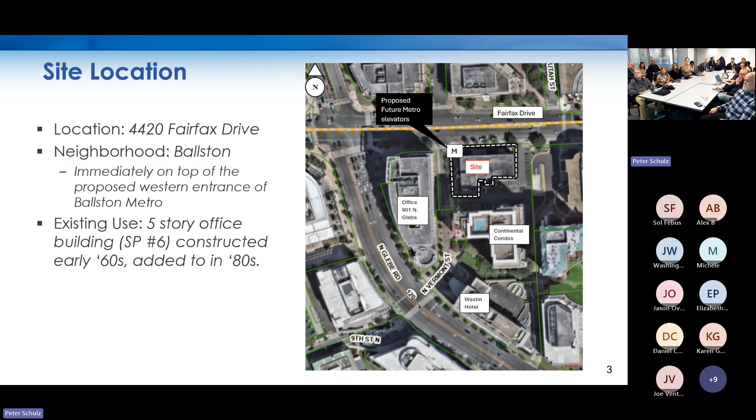A close-up of the site here: it is bounded by a street on the left, but private alleys to the south and east that are all part of the site plan 331 overall site plan.

Existing conditions that most people are familiar with: it's a 5-story office building that was built in the 60s and added on to and renovated over the years. I'm showing you some of these existing conditions, which I hope most people are already familiar with.

This corner on the left here is going to be the future location of metro elevators, which Daniel will tell you about a little more later. On the right, you get a sense of the alley system, which is private. There is a fire access easement over them, and it does provide service access and parking garage access to the Continental.

The existing office building had a small parking lot of its own. To give you an overview, what the applicant is proposing is something that was actually proposed and approved 20 years ago, but remains unbuilt to this day just because of economic issues.

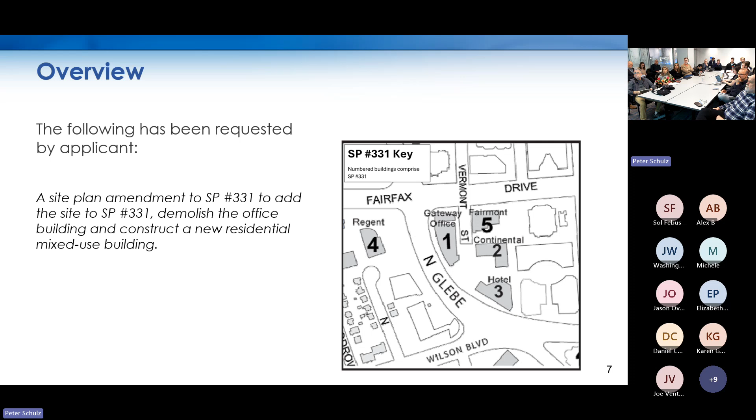What's being added to the site plan 331 is Fairmont Building number 5. So it's adding site area to the existing 4 buildings of this current Arlington Gateway site plan, which includes 2 office buildings, a hotel, and a condominium development immediately south of the Fairmont building. So we'll make the site plan bigger - that's basically what it is.

The proposed development, as you are aware, is largely similar to the 2006 approved development with a maximum building height of 246 feet, which is the absolute maximum permitted by the zoning district, as long as the developer provides a package of benefits that justify the extra height and density.

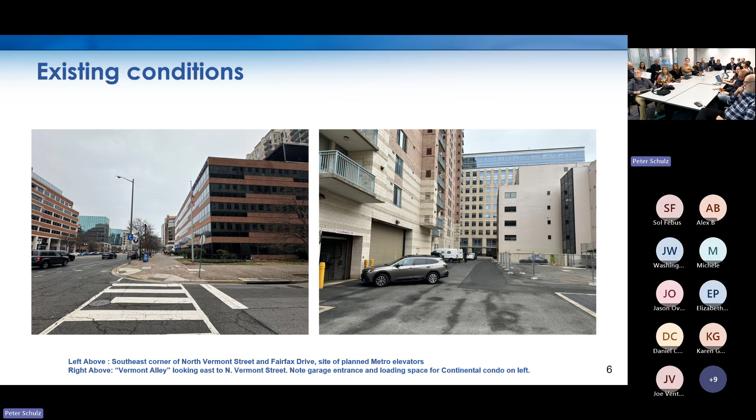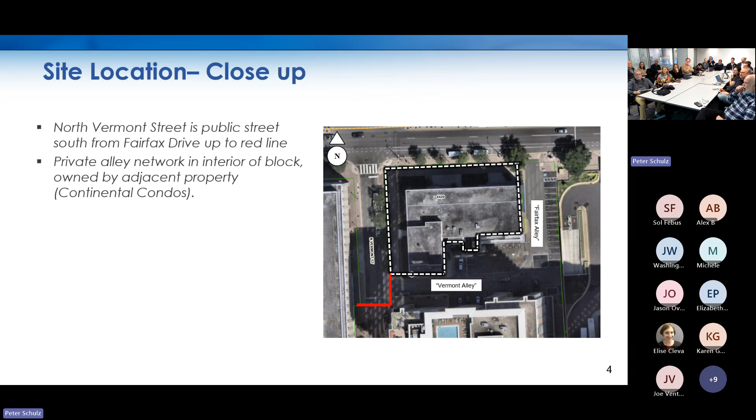So anyway, a very tiny site plan area, I should say. The actual land that the Fairmont owns is very small. The alley network is actually owned by the Continental, as we will see.

So I'll give you a brief description of what's going on here. There is less parking than was approved in 2006, which is consonant, as Daniel will tell you, with county practice and policies that we have adopted in the last 20 years, especially on top of a metro entrance.

There is a requested modification for the number of loading spaces, and later on you'll see a question that staff would like to hear the SPRC opine on about the depth of the proposed loading spaces.

Zoning modifications, as I alluded to - additional density and 30 feet of additional height - are all permitted by the zoning ordinance as long as there are community benefits, as a shorthand. These are items allowed by our zoning ordinance for environmental benefits, housing, or community facilities.

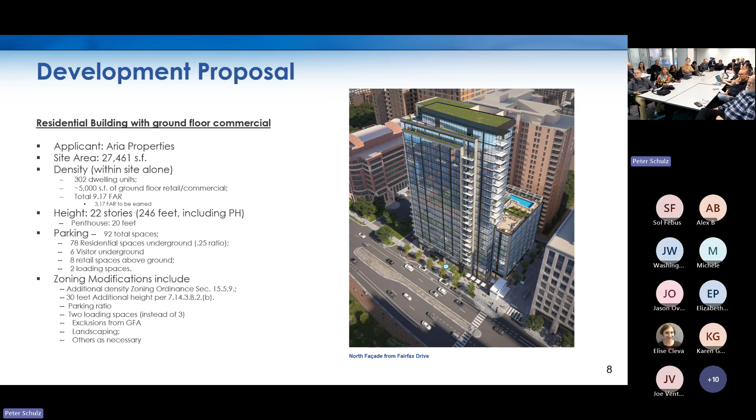A reduction of the zoning ordinance required parking ratio, and there may be some landscaping modifications from the zoning ordinance as well - we can see as we progress through this SPRC. The zoning is a special zoning district for Ballston.

The zoning and the GLUP match. So this site is already zoned appropriately, it's not asking for a rezoning or a change to the general land use plan. All of central Ballston is zoned the same.

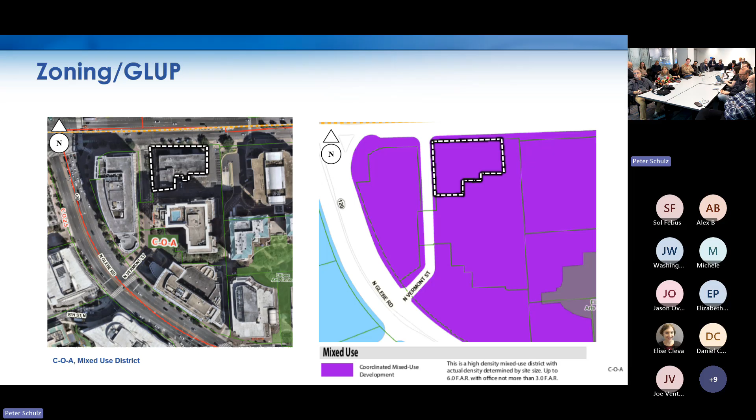The idea of this central Ballston district was to basically be a second downtown to Arlington after Rosslyn. When developed in the late 70s and early 80s, it was actually meant to encourage residential development, with incentives for residential development in this special zoning district, as we will see when we come forward.

The policy guidance is the Ballston Sector Plan, developed in 1980, but many of its recommendations are still valid with good urban design guidance. There's also the zoning ordinance requirements in the C-O-A zoning district, the master transportation plan and its various elements that Daniel will speak to, the Rosslyn Ballston streetscape standards, Arlington's retail plan, off-street parking guidelines for multifamily residential projects in the Rosslyn Ballston and Richmond Highway corridors, and other things like the community energy plan or affordable housing policy.

The land use and density: the sector plan does plan this area for high density mixed use. I spoke about the incentive for residential development.

Densities allowed, at least by the base density in the zoning districts, are up to 6.0 FAR, the second highest outside of Rosslyn, with office supposed to be no more than half that. In the early 80s, there was an imbalance of office development as opposed to residential development, so this was intended to incentivize residential development.

Also to consolidate large sites too. So the actual density and height that you qualified for would actually depend on the site area that you had assembled as a development site.

So the applicant's proposal is in line with what the sector plan says, residential use and retail. The density is about 9 FAR just on the site area alone, well over the base. However, because it's incorporated into site plan 331, all those 5 buildings of site plan 331 would only be slightly over 6.0 FAR altogether.

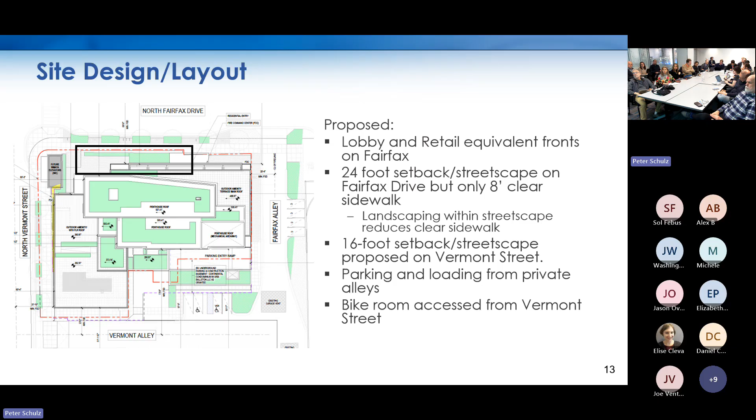There is a bike room accessed directly from Vermont Street on ground level, which is something we encourage. This shows the site design and layout, the residential lobby, and between two retail components, with the retail adjacent to a proposed plaza by the elevators.

Mr. Creed will tell you more about the county's plans for the elevators. You see the loading that comes off the back of house from the Vermont Alley.

Above-grade transformers, which staff has noted as an issue. The width of the transformers faces private property. The county's policy on transformers is that if they have to be above ground, and it seems Dominion has been forcing things that way, let's make them look as good as possible.

Regarding rights of way, Vermont Street will stay as a public right of way. We've just confirmed that with the applicant — they're not vacating Vermont Street. It will stay. However, Vermont Street right now does come to an end, and then it is private, shared between the Continental and the hotel.

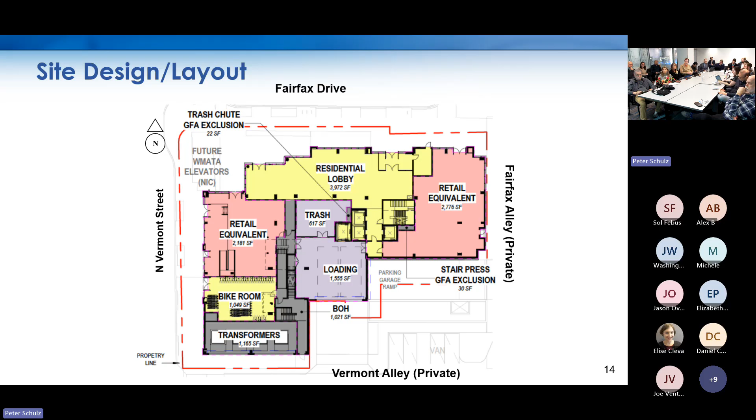So let me speed things up and turn it over to Daniel. Thanks, Peter. I'm Daniel Creed with the Department of Environmental Services, and I'll be covering the transportation topics.

The site is at the corner of North Vermont and Fairfax Drive, and it's well served by a variety of multimodal transportation options. Within an eighth of a mile is the Ballston Metro Rail Station, serviced by the Orange and Silver lines. There are also local and regional buses at the Ballston Station bus bays, and on site there's an existing ART and Metrobus stop at the corner of North Vermont and Fairfax.

There are also several Capital Bikeshare stations located within the vicinity, including Fairfax and North Taylor, North Stuart Street, North Tazewell and Glebe, and 11th Street and Glebe.

As Peter also mentioned, the site is subject to transportation policy found in the Master Transportation Plan, the Rosslyn-Ballston Corridor Streetscape Standards, and the Ballston Boulevard Area Plan, also known as the Sector Plan. On the right, you can see an excerpt of the Master Transportation Plan map with the site highlighted.

The MTP identifies the adjacent segment of Fairfax Drive as a Type A, primarily retail-oriented mixed-use arterial road, planned for 2 to 4 travel lanes, turn lanes, no median priority, restricted or limited driveway access, and high on-street parking priority. For North Vermont, the MTP...

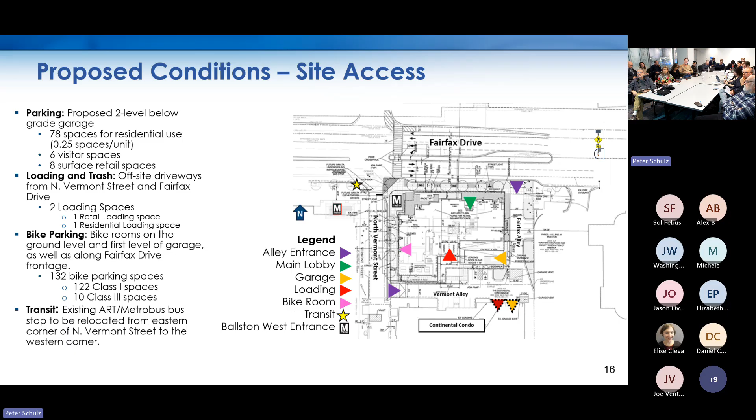The applicant is requesting a parking reduction based on the off-street parking policy for residential multifamily projects within the metro corridor. This policy allows site plan applicants to request reduced parking rates based on proximity to metro station entrances, with rates ranging from 0.2 spaces per unit for sites closest to a metro entrance, within 1/8 of a mile, up to 0.6 spaces per unit for the furthest.

That's where this site is located. Within the 0.2 ratio, the minimum required under this policy would be 60 spaces for residential, and the applicant is proposing a residential rate of 0.25 spaces per unit, or 78 spaces.

In addition, calculated separately from that 0.25 ratio, the policy requires providing visitor parking of 0.05 spaces for the first 200 units, which in this case would be 10 spaces required, and the applicant is proposing 6 spaces at this time.

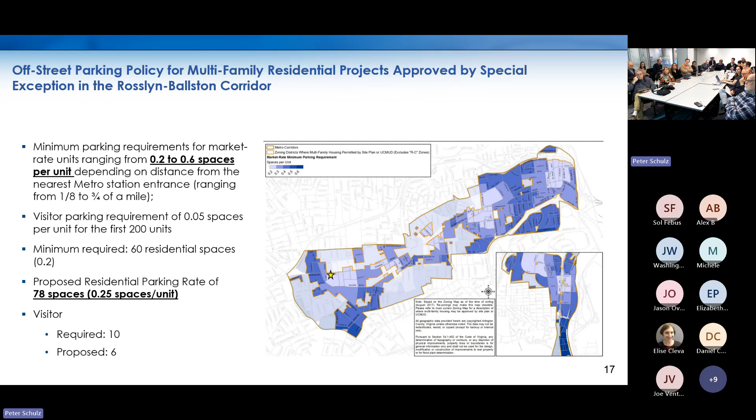For loading, the zoning ordinance requires 3 loading spaces, 2 for residential and 1 for retail. The applicant is proposing 2. The dimensions meet our zoning ordinance requirements, but standard site plan conditions require one of those to be longer: one is 30-foot, and one has to be at least 40-foot in length. Both are proposed at 30 feet.

It's also required, under site plan conditions, that if one of these spaces is being used for trash, which it is, it must be at 15 feet in height. The applicant is proposing 14 feet in height.

There is a large surface driveway due to the nature of this site, with loading and access being through the Continental property. The red is the property line. So the concern could be, the site plan conditions also require loading activities happen behind closed garage doors. If that 40-foot truck came, would they be able to close the doors, or would those loading activities spill out?

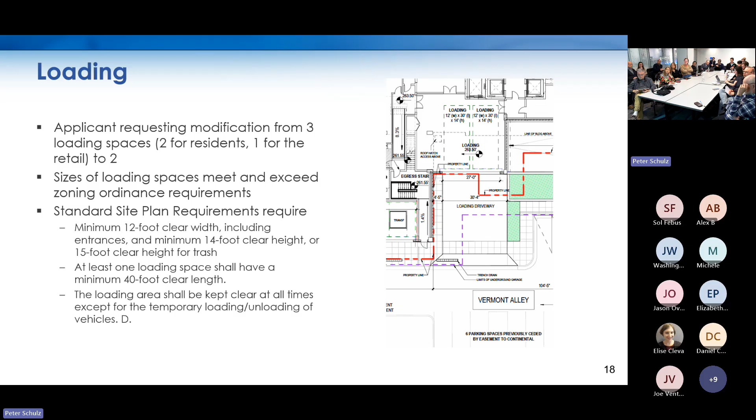All right. Button, or do you want to go back? No, don't go.

Next we will look at the proposed conditions, starting with Fairfax Drive, and we'll summarize the changes on the right. Within the Rosslyn Ballston streetscape standards, Fairfax Drive is identified as a special streetscape, which requires a minimum 24-foot wide overall streetscape, street trees within a 5 by 8 or larger tree pit, setback 3 feet, and a 16-foot clear sidewalk. You can see the cross section above.

The applicant proposes to reduce the overall width of Fairfax Drive to 92 feet by slightly narrowing travel lanes and parking lanes, but the overall configuration is unchanged from today. In terms of streetscape, the applicant is proposing to meet that 24-foot wide overall streetscape, with a 0.67-foot step-out zone, a 6-foot wide tree pit, an 8-foot wide clear sidewalk, and a minimum 9.3-foot building shy zone.

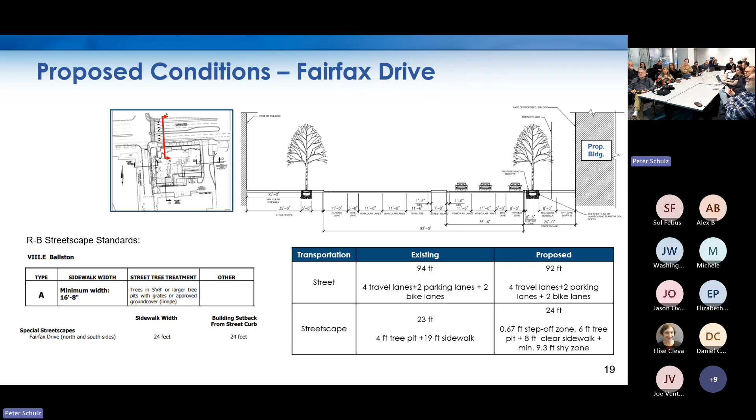And then we'll look at North Vermont Street.

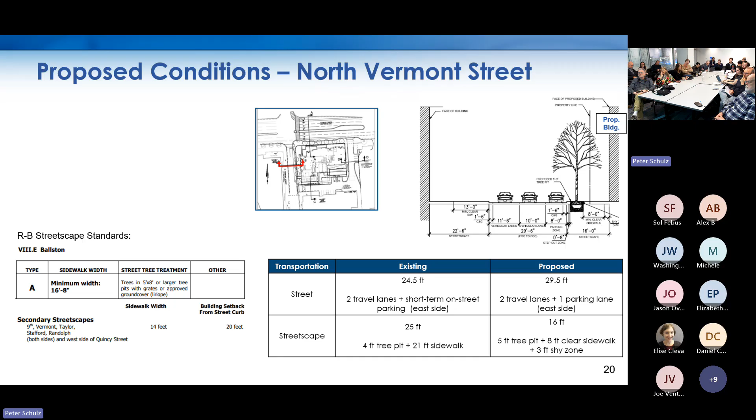That's identified as a secondary streetscape, requiring a minimum of 14 feet plus the 6-foot building setback, totaling 20 feet. That consists of a 6.67-foot step-out zone, a 5-foot wide tree pit, and an 8.3-foot wide clear sidewalk. The applicant is proposing a 16-foot streetscape, a 5-foot wide tree pit, an 8-foot wide sidewalk, and a 3-foot wide building zone. The alleys are off-site, so we don't cover those.

This project is fully funded. They have completed their 35% design and are currently in the contract negotiation phase. This phase should take about 8 to 12 weeks as they negotiate that contract. After the contract is negotiated, notice to proceed is issued to the design builder, and that's when they'll resume design and pick up from the 35%, starting those other major milestones in the design.

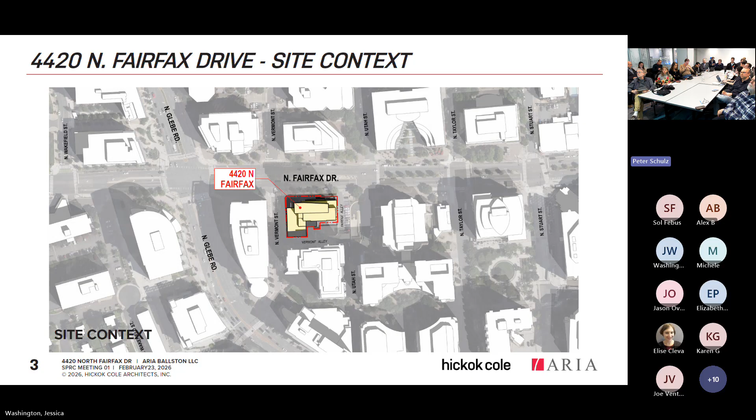The site is zoned to the C-O-A mixed-use zoning district and is designated as a coordinated mixed-use development district by the county's general land use plan. The site is currently improved with the Fairmont, a 5-story office building constructed in the 1960s under site plan number 6. There are a few existing tenants, including Arlington County Public Schools, which has been temporarily using the building as the location for Arlington Community High School, with plans to relocate the school to its new location at Amazon's headquarters building at Metropolitan Park.

Originally, the property belonged to site plan number 6, but in 2006 the county board amended site plan number 331 to incorporate the site into the existing site plan known as Arlington Gateway. The site plan has been extended numerous times since, and the approved plans have remained largely unchanged.

As it stands today, site plan number 331 provides for an L-shaped 23-story residential building containing a total of 242,846 square feet at a density of 8.84 FAR, with 237 dwelling units, 7,088 square feet of retail space, and 241 below-grade parking spaces. As the previous owners of the property never brought the approved site plan to fruition, Aria Ballston LLC looks to refresh the approved building with proposed updated building designs.

Since acquiring the property, we've been working diligently to prepare plans for the development and have met numerous times with Arlington County government representatives, WMATA entrance project representatives, and neighbors, including the Continental at Ballston Condominium and the Ballston-Virginia Square Civic Association. We are pleased to share with you our plans this evening.

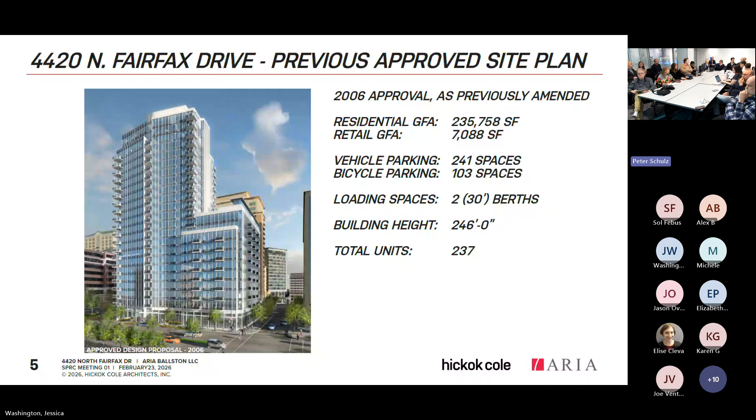The submitted plan, and I should add that some of the stats that were in the prior presentation by the county officials, we've incorporated feedback that we've heard from the county, and what you see in the statistics and images here are updated plans from what was just presented. So it's not just saying the same things that you guys just presented.

The submitted site plan amendment includes a 22-story mixed-use building containing 302 market rate units and 251,737 square feet of gross floor area at a 9.17 FAR. The building will also include approximately 4,957 square feet of retail or retail equivalent GFA and a 2-level below-grade parking garage with 88 parking spaces.

As previously noted, the current site plan approval has remained mostly unchanged, and our proposed massing is very similar to the massing of the existing approval. Given that the existing approval is from 20 years ago, there is need for redesign to bring the site plans into conformance with modern architectural form and current codes and design standards.

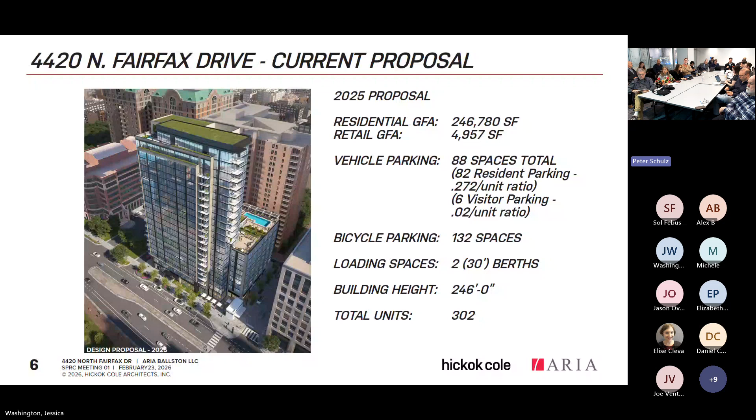As such, we are proposing changes that will refresh and update the building design while staying within the general parameters of the approved building. The residential lobby will be accessed from North Fairfax Drive. We have planned for 2 retail corners with frontage on North Fairfax Drive and North Vermont Street. We have prioritized bicycle storage with a secured bike room at the ground floor with access from Vermont Street, as well as a second bike room located on the first parking garage level.

Site improvements surrounding the property include 24-foot and 17-foot streetscapes on North Fairfax Drive and North Vermont Street, respectively. In response to county feedback on earlier plans regarding the Fairfax Drive frontage, we have widened the clear sidewalk space along North Fairfax Drive from 8 feet to 10 feet 6 inches, with a 6-foot tree pit zone.

Additionally, we've incorporated a 40-foot long curb extension to support the bus stop at the far corner of the Vermont and Fairfax Drive intersection. Also along Fairfax Drive, there's a curb lane of street parking, an existing bike lane, and a curb extension on both sides of the Fairfax Alley.

The streetscape at North Fairfax Drive is planned for a 24-foot dimension and is even wider at the curb extension locations. Our plans propose widening Vermont Street to 28 feet 6 inches to include a proper curb lane for parking, given the existing street does not comfortably accommodate parking.

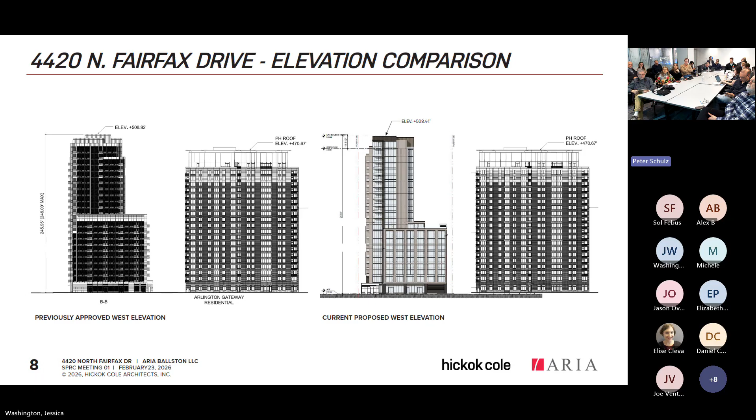So, comparison of the previous approved design and our current proposal. Similar to the previous design, the current building is made up of two major massing components: the tower component, which extends to a height of 246 feet, and the podium component, which is the lower portion of the building that fronts Vermont and forms an L shape. Overall, the height is the same, and you can see in this diagram that the proposed height of the new podium is a little bit lower.

As you move vertically through the building up to level 10, you'll see on the image on the left-hand side a residential amenity deck that will have opportunity for outdoor space and greenery. As you continue into the tower component of the building, levels 12 through 22, the units get a little bit larger, all the way up to the penthouse, where there's an additional residential amenity and terrace to again take advantage of the views, especially to the northeast and back to Washington, D.C. That level also houses the mechanical penthouse.

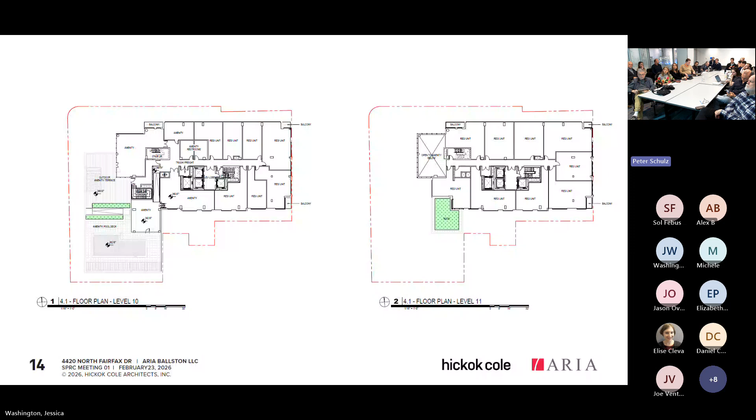I think our next slide is probably the site improvements. Sure, John, I can walk through these quickly if you don't mind. I can do it.

So momentarily, you'll see a more detailed look at the landscape and streetscape plans.

As mentioned previously, the North Fairfax Drive streetscape will be 24-foot wide, and North Vermont Street streetscape will be 17-foot wide, with even greater width where there are curb extensions. These large streetscapes will dramatically improve conditions for pedestrians.

A 40-foot long curb extension along Fairfax Drive with a clear sidewalk zone for the bus stop brings the current outdated bus stop up to date with current county standards and ensures buses have easy access to the new metro entrance, so riders will be able to safely access the bus.

There will also be a parking lane and bike lane on North Fairfax Drive, and we are proposing to widen Vermont Street with plans for a true parking lane on the east side of Vermont Street.

We're planning, as stated earlier, for large 6-foot tree pits on both frontages that range in length from 12 to 15 feet. Earlier plans did show narrower 5-foot tree pits on Vermont Street, but we've increased those widths. These generously sized tree pits will foster the growth of trees that will help cool the site, provide shade for pedestrians, and create an attractive streetscape for the community near the new metro entrance.

Widened sidewalks and shy zones are proposed on both street frontages to support pedestrian movement, with clear sidewalks of 10 foot 6 inches on Fairfax Drive and 8 foot on Vermont Street.

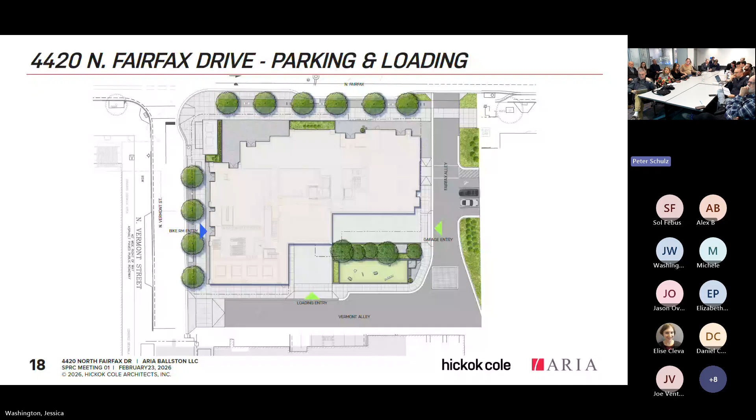A total of 122 long-term and 10 short-term bicycle parking spaces are proposed to be provided. The secure bicycle storage facility is located on the ground floor with direct access to North Vermont Street and a secondary room on the first level of the garage.

Our proposed parking ratio for residential use is 0.272 spaces per dwelling unit. A modification for the proposed residential parking ratio has been requested along with the major site plan amendment.

As everybody knows, the property is located within a transit-rich neighborhood of the Ballston area. The Ballston-Marymount Metro Station is approximately 0.1 miles away from the site, and an additional metro entrance is planned immediately adjacent to the site.

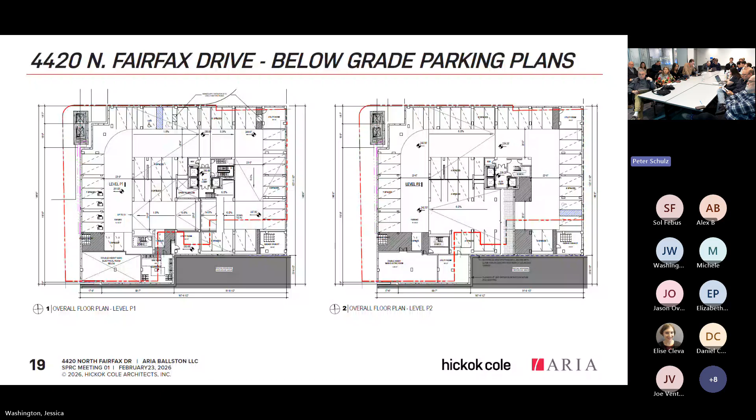16 different bus routes are accessible within a quarter mile of the site, and several on and off-street bicycle facilities surround the site. Vehicular and loading circulation routes will utilize all the frontages available along the property for access and have been designed with consideration for the shared uses of the alley network.

by the Continental of Ballston condominium. The bicycle and pedestrian experience on the site will be improved as there are multiple access points to the site along Fairfax Drive, Vermont Street, and both alleyways.

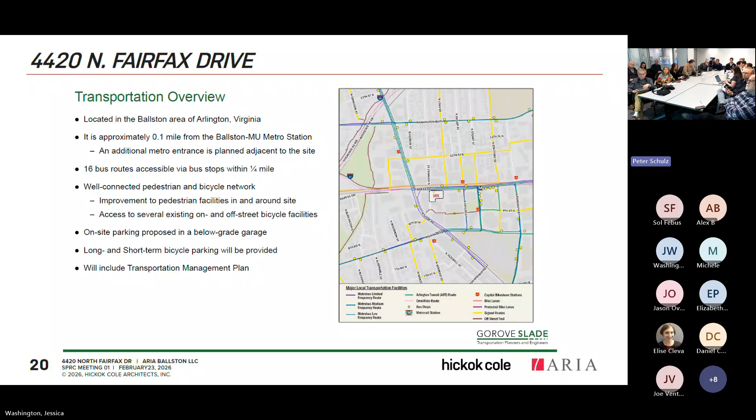You want to go to the next slide? Yeah, I'll just get into it.

Loading vehicles will be able to access the Vermont Alley with ease as the inbound loading can enter from either North Vermont Street or North Fairfax Drive. Similarly, the outbound loading traffic will simply be able to pull out directly onto North Vermont Street or North Fairfax Drive.

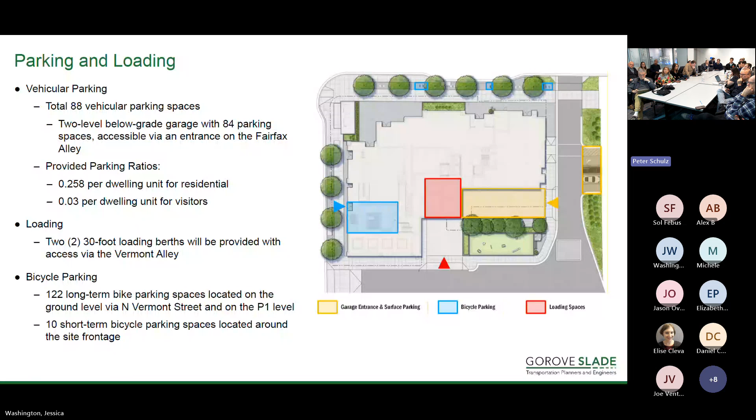Our transportation engineers have studied the turning maneuverability and are confident that the truck and vehicle turns work successfully without issue.

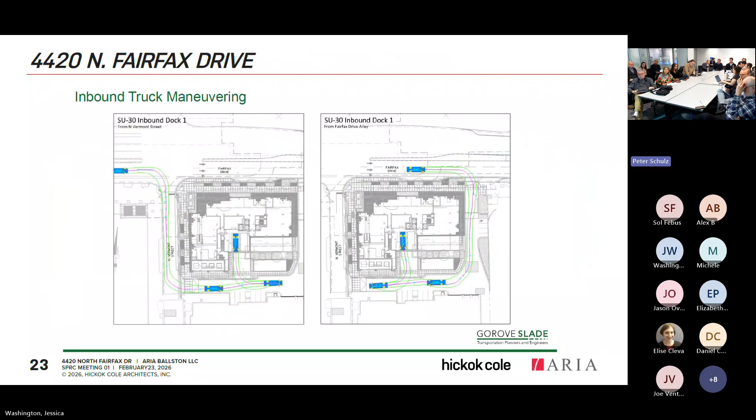A transportation management plan will also be put in place for the property, providing benefits such as facilities improvement, participation in funding, promotions, services, and policies, and performance monitoring.

So here's our inbound and outbound truck maneuvering showing the turning diagrams.

Yeah, the changes. Pretty much there.

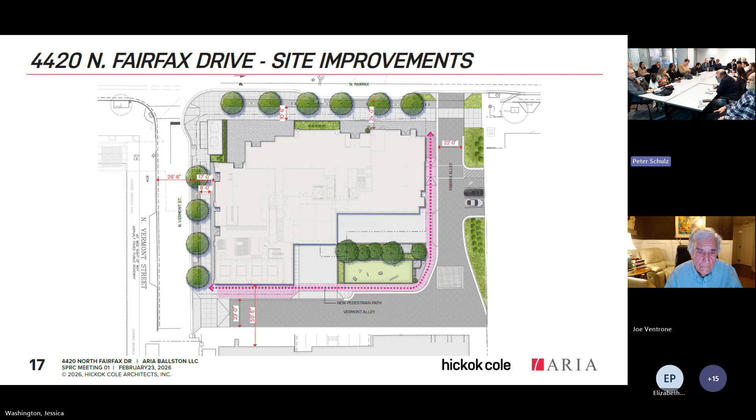And then it pivoted in 2019 to a cash contribution. At this point, the metro funding is largely allocated, and waiting for it to be paid with a certificate of occupancy from this building wouldn't really make sense, because we're hoping we're building our building at the same time the metro station is being constructed. So I'd expect, while we continue negotiating the benefits package with the county, that it's going to go towards something else, because all of us are hoping this metro station shows up soon. Let's put it that way. Okay, thank you, hopefully it shows up. Thank you for the question.

Yes, comments are fair game. So to echo one of your comments earlier on the Fairfax Drive situation, we similarly have a lot of concerns about it.

I think one of the buildings recently, the J Soul, down the street does not have any short-term parking out front, and I've never walked, drove, or biked past Fairfax Drive, past the J Soul without seeing at least one or two cars double parked there.

We feel that one of the better solutions to that is moving the bus stop, as proposed originally, to the other side of the street and swapping that with the existing handicap parking spot. It allows there to be more room for a combination of handicap parking, short-term loading, unloading, 15-minute and 2-hour parking along Fairfax Drive.

And similarly, echoing the comment my colleague made on the metro coordination on North Vermont Street specifically - this project is the focus right now, but the reconfiguration of all the road plans ties in with the metro construction. Making sure the impacts from the metro entrance, with all the pickup/drop-off traffic generating cars waiting on the street to pick up loved ones or Ubers, taxis, etc., is considered in whatever parking ends up being along all the street fronts.

We also appreciate the developers' responsiveness in some of the changes around the back conditions. One of the biggest problems with this whole area is the lack of green space, so removing those 4 parking spots in favor of the pet run and trees is something we'll appreciate every day, driving past it, walking past it.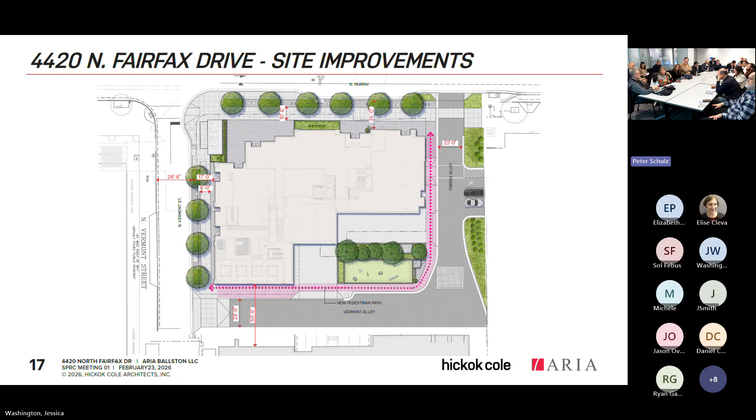Because right now I'm not particularly concerned because there's nothing there. But when the metro entrance opens, which presumably is 2029, really strongly, as it's getting close to that, think through that and how to deal with that. Because, like I said, 100% people will be crossing the street there, and not one or two - it's going to be happening quite regularly.

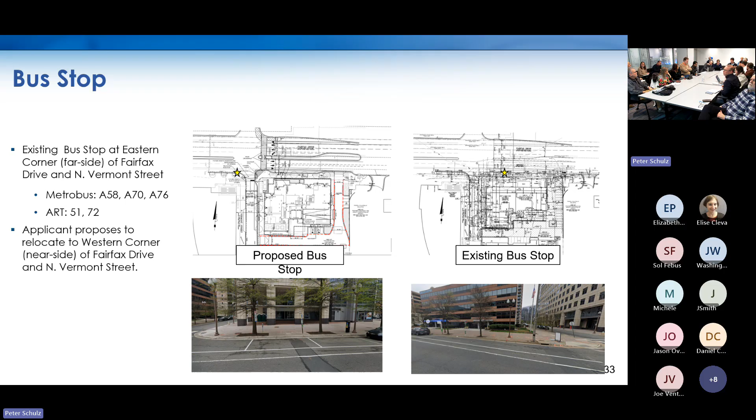Yeah, so I just wanted to say I totally agree with Commissioner Lantelmi, and in looking at the staff presentation, all of the staff slides show that crosswalk there. So I don't think I caught that it wasn't going to be there because I was like, perfect place for it. So thank you for bringing this up.

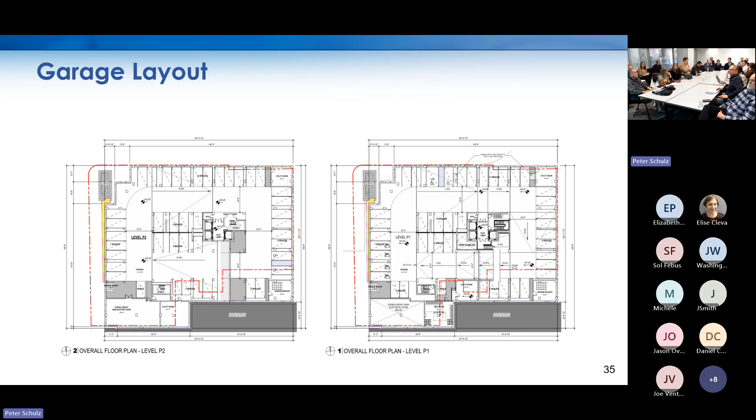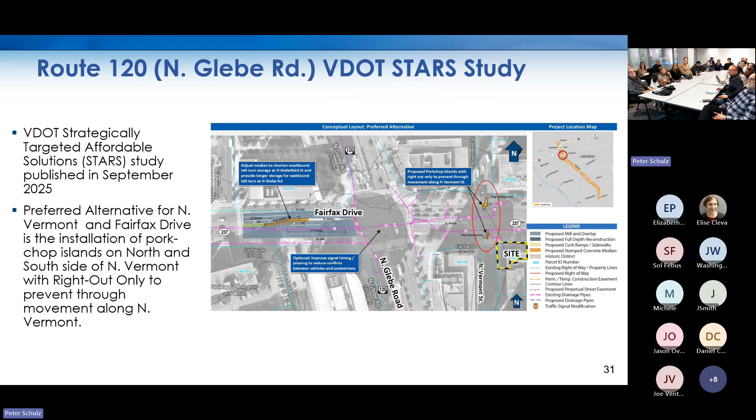They might have pulled it off our plans. That was a comment on the latest. We haven't gotten the most recent, so I don't know if they've taken it off or not, but I'll show you the proposed North Utah crosswalk.

For what it's worth from the applicant's side, obviously we originally proposed it, so please just let us know. My only concern with all of this is that, while I personally want to believe the metro entrance will be built, it's been a long time, and I've heard this story before, and we have been hoping it gets built many times before.

So we'll see. Commissioner Forrest, can you put a pin in that? I need to move on to the next topic, and if we have enough time, we'll come back. But now we need to move to land use, design, density, and site design.

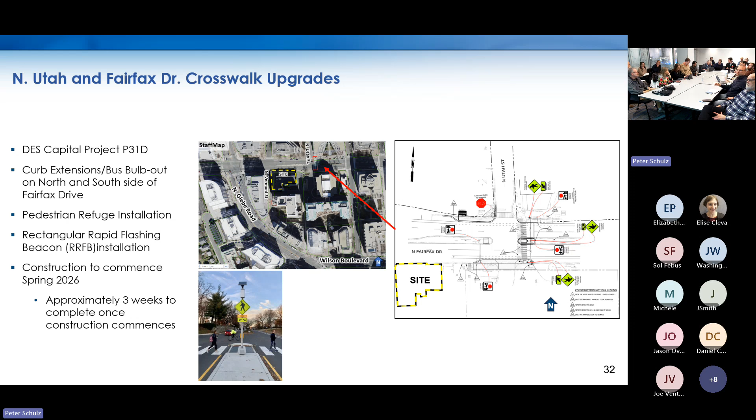Fine with me. We've given this a lot. I would say this maybe wasn't design and what we were just talking about, which is kind of confusing about the timelines across this.

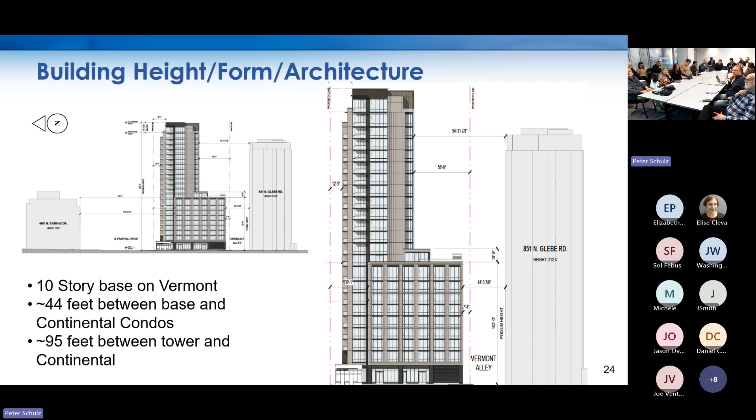We would love to do it at the same time. I don't want to tear everything up and rebuild it. We don't want Metro to do that either. That would tear things up. But there's not much we can do. John, what more do you want to say? Yeah, meeting with them.

We'll do our best to coordinate if it's feasible to do it. Currently, we have plans in terms of what it means for our structure excavation. If we start before them, or if they start concurrent, or start after, we'll be able to build our building either way, and we'll just kind of ride with it.

I'm not worried about Metro actually being on time with anything, but more about the county coming in and starting to develop a plan for the area as you're breaking ground. So I was wondering, is there a better question? But I don't think... let Daniel collect his thoughts.

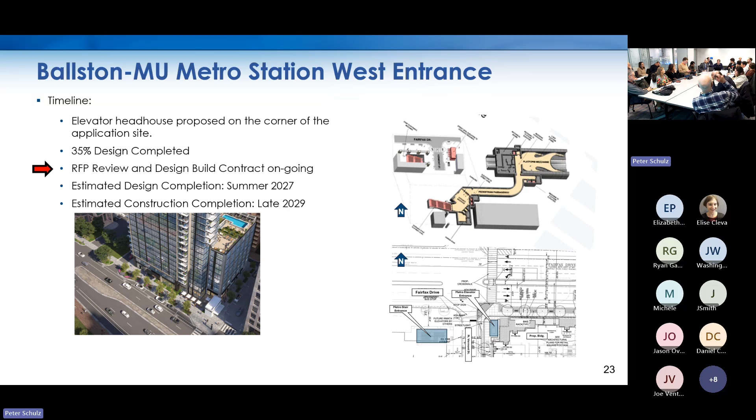Just following up on what Kenley said, right now the plans call for a lot of hard space around the metro elevators. I understand there's a green planting strip there, but is there any chance we could expand the green space?

This is something staff has also noted to the applicant as an issue. There's going to be a French drain at the rear of the elevators, and Daniel's colleagues at DES and Transit don't think green space would be compatible with a French drain, but maybe they could move it, or do something else in the private plaza. We've studied that, and our perspective is that the trench drain or French drain is needed based on existing site conditions because the grading doesn't align with the elevators. But what we're doing is sloping it appropriately for water to drain.

Yes, absolutely correct. So there's probably no need for it, and the planters both absorb water that falls from the sky and soften the landscape around the elevator. We'll share that with DES and Metro to confirm. So the answer is there will be an area for planting now. We might be able to work in an alternative into the conditions, just to protect ourselves against the need to convince WMATA of the truth, which can take too long, but we can account for both possibilities.

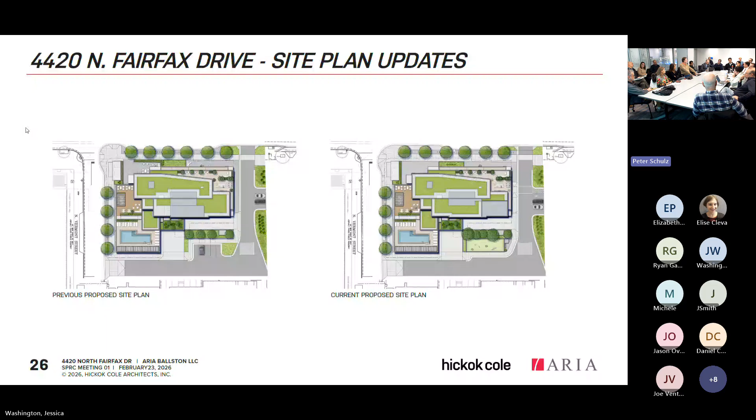Adding to that, one of the other reasons we requested relocating those or looking at a different place is for ensuring accessibility and clear area around the elevator, for users to get through to the building in a non-circuitous way. We also saw that comment and looked at it from a different angle, where there's a small tight position that might be an unsafe spot for somebody hiding and jumping out, so we wanted to avoid that. We were filling it in intentionally with the planter to mitigate that kind of experience.

Speaking of people jumping out, what's your take on passive surveillance for the retail spaces that sound like they might be retail, but are retail-adjacent and not really retail? What's happening there that will help with the perceived safety, like eyes on the street?

Eyes on the street - we tend to put security cameras on the exterior of spaces, particularly around egress doors and common travel areas, so we're happy to do that there. We'd want to activate those spaces with uses that are either retail outward uses or active amenities within the building, so there would be people looking through windows, however it's used. That space is right next to the metro.

So the relationship - is that a gym, or you don't know yet? It's 5,000 square feet of retail. Often retail space, even after it's built - if it doesn't go to retail, what will it go to? What's the general thought on that? I don't know, but we have guidelines on what retail equivalent is - things like Minute Clinic by CVS, things that generate foot traffic. The lobby, a meeting space for tenants, real estate is probably part of it.

In that corner specifically, near the metro, there's a lot of activity, so I wonder if some of that will transfer to your corner - because the cameras aren't going to deter that. If the metro entrance is constructed, I think it'll be a pretty decent retail site. We'll see - retail's a challenge. It's difficult. Our ideal would be to put real pedestrian-oriented, neighborhood-oriented retail, cafe, restaurant, whatever. But anything I say today is not going to be certain. No, of course, you can't tell. I have no idea.

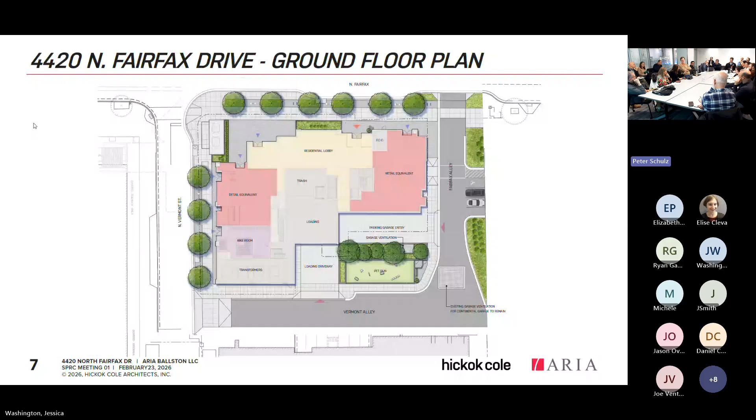My question is really about the orientation of the building, because the southwest facade is going to be very hot, with heat gain issues. I know you've addressed the back side being more brick and less glass, but that southwest corner - the Fairfax and Vermont corner - is going to get a lot of heat gain. I'm wondering if there's a way to articulate this building so it follows the sun path rather than just front and back.

You see that? The balconies are going to provide some help with that, because for the low Western light that comes in horizontally, there's not a lot of protection from it that just comes from shape. You actually have to provide particular glazing, or maybe not so much glazing. I'm just wondering if there's any provision or attention to that.

Tom, do you have any thoughts? Balconies are intended to help with some of it. Right, I see that, especially as you get higher. Other than that, no, it's intended to be glass.

Right. Can you go to the rear element? You're going to need to do some energy studies then. Yeah, we're going to have an energy consultant and an energy model for the building, plus a green roof on top to help with cooling.

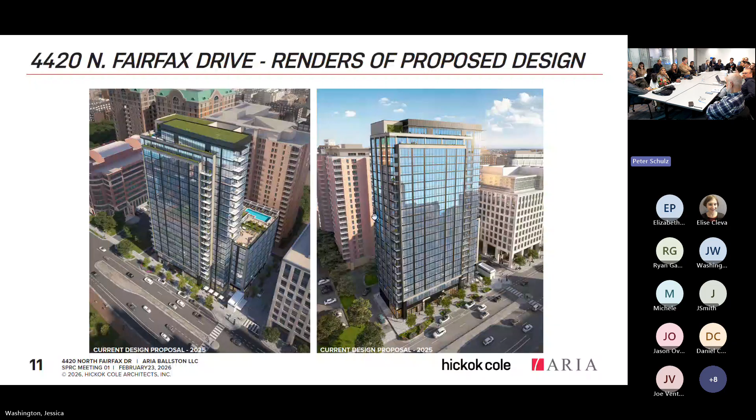The back also has a portion of the building that's opaque and not glass. Yeah, that's in the back. It's just around that corner - the northwest, western elevation corner. Most of that corner is actually...

There it is, you can see it in the right image, all the way on the left. I think that's pretty much exactly where you're referencing, and that's towards the back, which is already protected by the building next to it. So all those balconies there are actually facing Fairfax - they're not going to be enough to really help with the heat gain.

So I'm just asking an honest question about whether you should address it or not, since you've addressed the front and back. It gave me the idea that there's maybe a way for you to blend those two sides - your suggestions. When you have more solid brick on the back and more glazing in the front, maybe that intersection at the corner becomes less transparent and more opaque. It's also a way to articulate the corner.

Our bottom 10 floors are masonry and fully wrap around, so the glassy portion is from floor 11 and up - which is where the sun is going to hit the most, sorry to say. So any kind of vertical garden or features - I know it's controversial - but something that pays attention to that. Also, your footprint has a lot of articulation, but then it's basically extruded straight up past the 10th floor. So I'm wondering if there's something more interesting in that corner that can also address this problem.

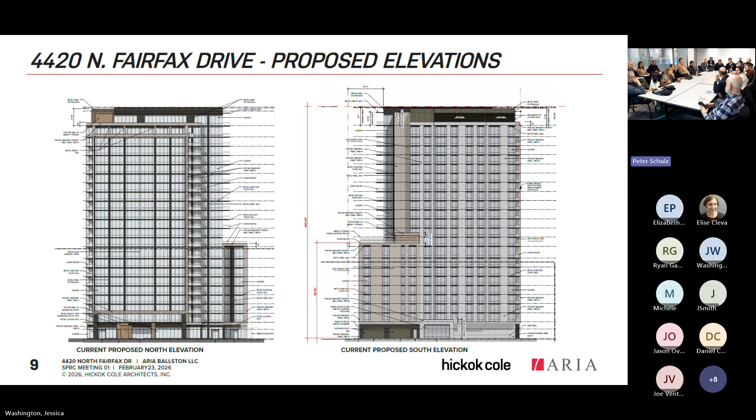Thank you, I just want to kind of echo the point about the bird safety glass. It was mentioned in the previous staff report and also at the October meeting you had with the Civic Association. Somebody had mentioned that as well, so just wanted to mention that other people had brought that up elsewhere.

I just want to align myself with Commissioner Parker's comments, and I'm surprised the tree guy hasn't said anything yet, but anyway.

Before we get to that, I would love to see some other alternatives that you guys are exploring and an effort made, whether it's bird friendly or however you've done it. And Forestry and Natural Resources, I know they also have options, because I've used them myself. They're not decals, they're things that can go on the windows. They're like $30, and they don't look like the old fashioned crow picture or anything like that. They're really effective at what they do.

So there are a lot of other ways that you can look at this, but the last thing you want, as she said, we spend a lot of time—and if you've been out to Ballston Wetlands, you do have migratory birds, and this is going to be a very big building. You don't want people to come out and see dead birds around. So whatever you can do as this process continues to address that, the birds would appreciate it, at a bare minimum.